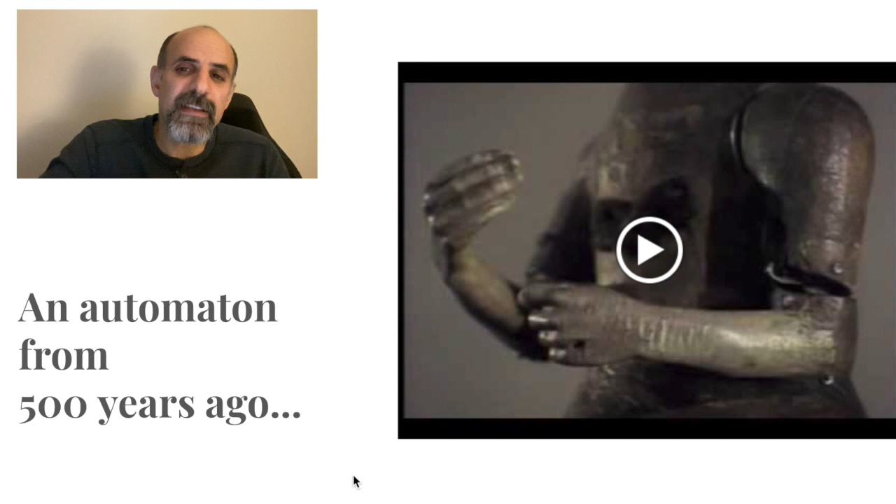So I'm including this short video, a figurine that is not exactly a robot. Nobody, by the time this was built, would have been using the word robot, but it's a figurine that works like a clock. It's a clockwork mechanism that you wind up, and it moves its mouth, it moves its feet, it moves its hand, it nods the head.

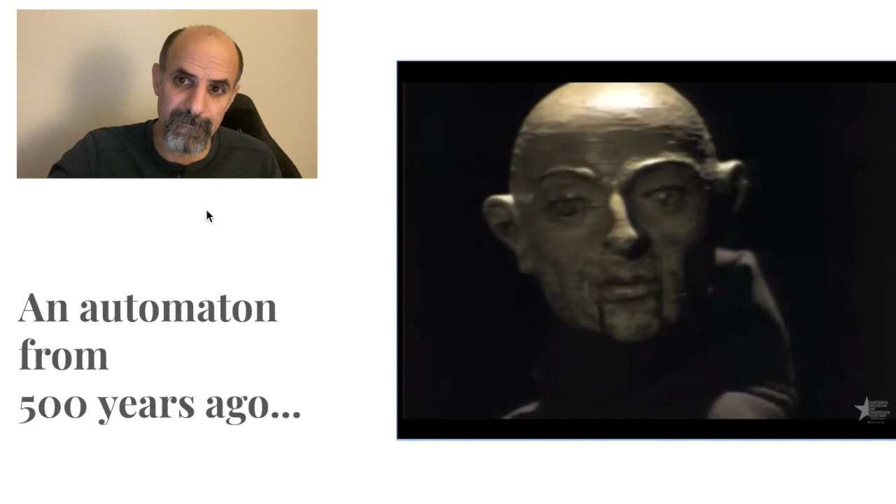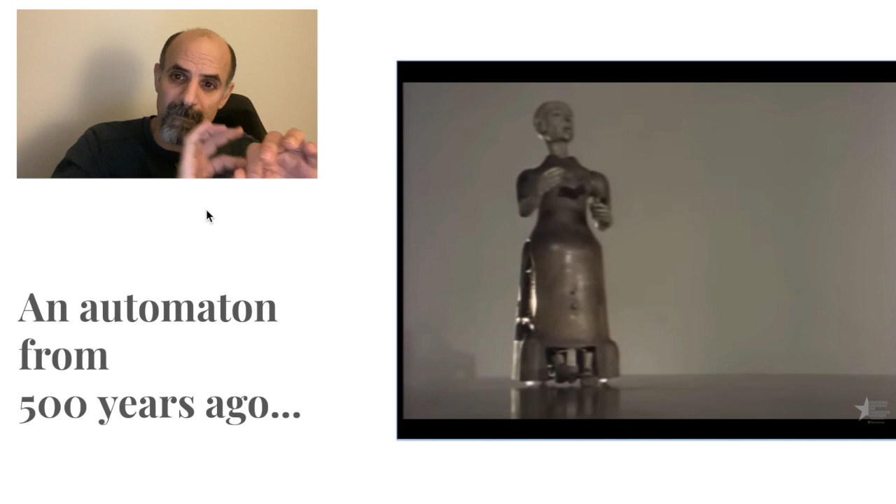So there's a very important question here: 500 years ago, some monk dedicated a lot of time to polish brass, right? Because you wouldn't go and buy it, you'd make the gears, craft these ceramic elements, all to make a machine look like a human, with functions and attributes that humans have. And this is 500 years ago.

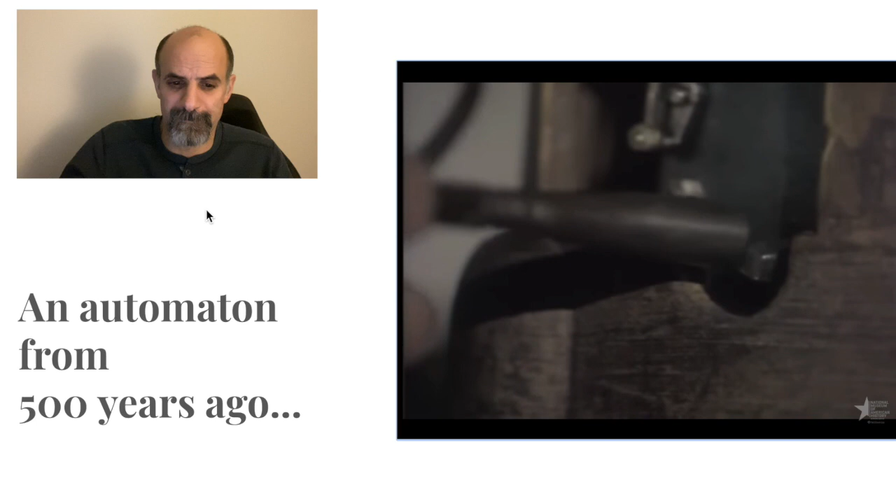We have proof of this. We also know that the word robot itself is a new word. The first time it was used was in 1921, in a play that used an element we could almost define like a zombie, where there was a human-like actor in the play, in the theater, manufacturing things, building things for others. Instead of calling them zombies or slaves, they called them robota. This word robot was later picked up by other science fiction writers, and a lot happened.

But I think I'm making a point here. 500 years ago, we didn't know what these things were, but we were already imagining them. I could even go much earlier. But if the first time we were using the word was in the 1920s, this is something really new, and there's a mysticism about what we imagine, very different from the pragmatism of the implementation.

So in general, we are faced with the idea that robots are made with software, electronics, and some mechanical elements. But is that true? Is a robot composed by those? I think we should think a little bit about this. If we go to Wikipedia, one of the sources with a lot of collective editing of definitions, it says something like: a robot is a mechanical or virtual artificial agent, usually an electromechanical machine that is guided by a computer program or electronic circuitry. But I think we'll be missing the point if we only read this definition.

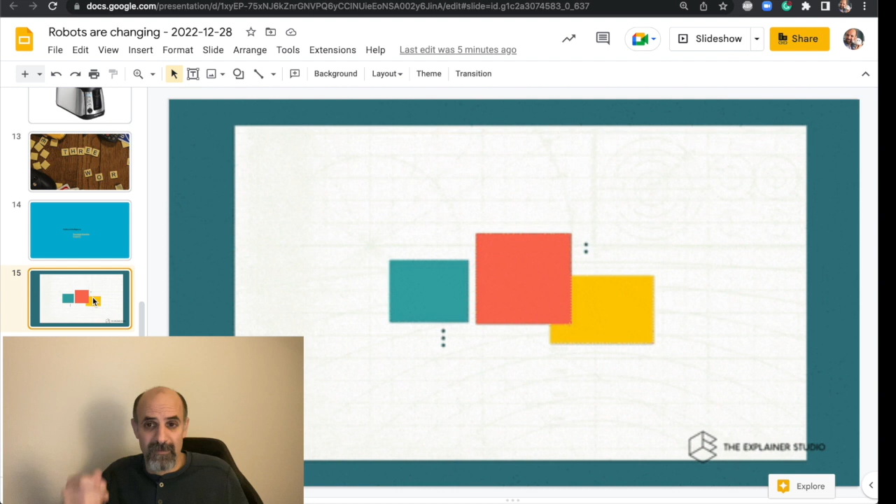And the other thing that is very up to date is that we have things like this, we are used to having technology that is trying to emulate the way we think. So I invite anybody to try the beta version of OpenAI. All scholars around the world are talking about this, to which extent humans are so unique. So you will see that you can even chat with it, and you will see that this really changes the way that we think. We can program a set of tasks. The monk at the beginning of my talk was just moving the hand, the mouth. But what happens if suddenly we have another set of tools?

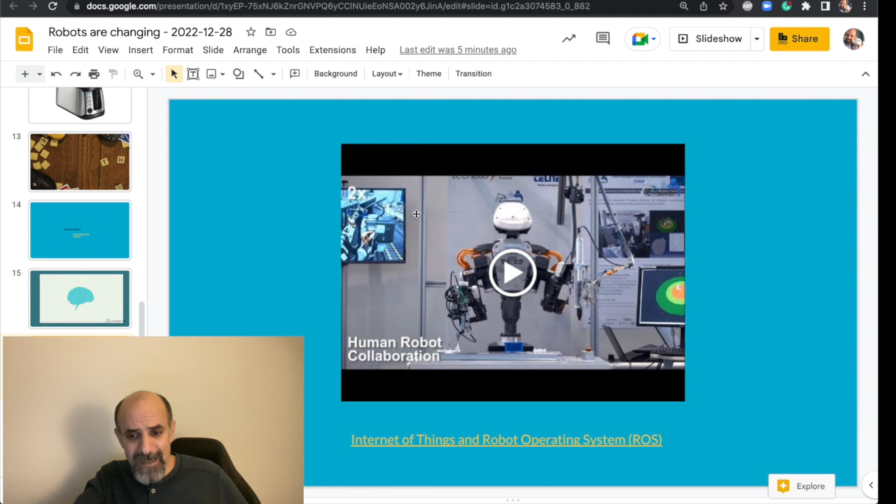And another word, because I said I will talk about three different words, another word is IoT, the Internet of Things, with the idea that everything is connected with everything. And this used to be almost like a fantasy, or like something that scientists around the world would think: oh, what if we put more than two computers together? What if we put more than four computers together?

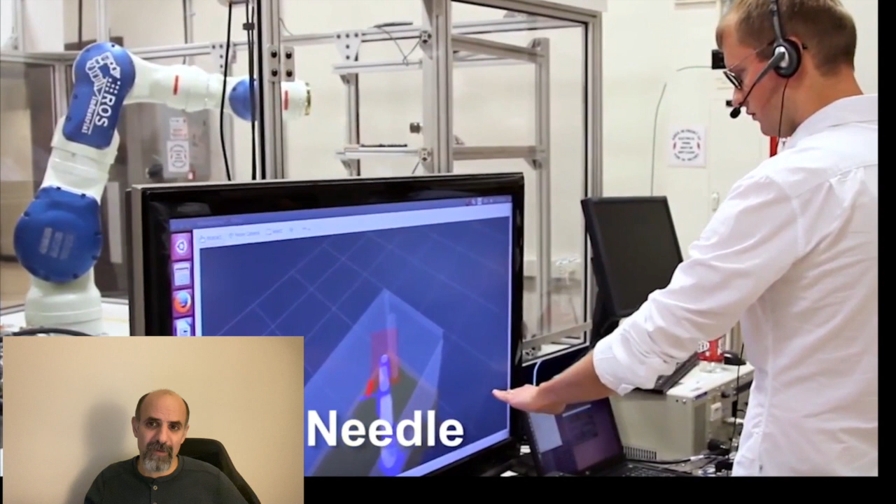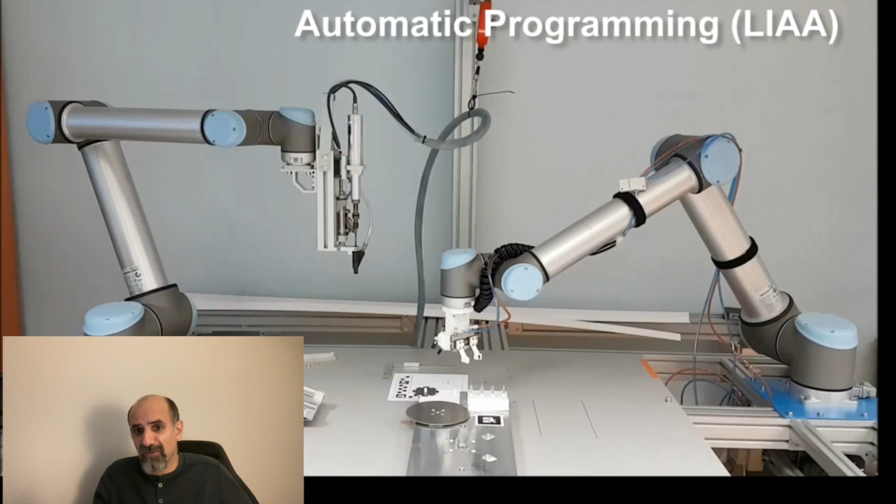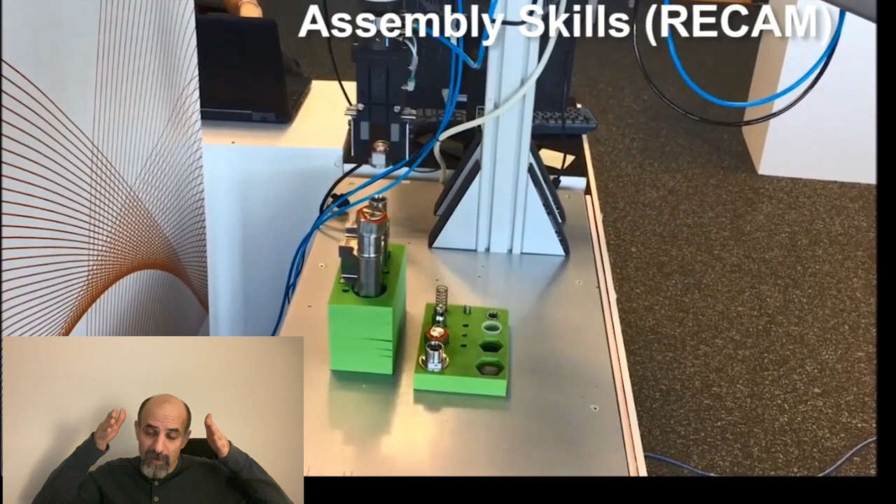So right now I'm showing images. This is the 5th anniversary of the Robot Operating System. It's, I would say, the most advanced system of programming robots. And it's using something that is decentralized. It doesn't use a concept that is a very old architecture. It's very dynamic because every part of the robot can be addressed as a messenger, and they're all listening to each other, and that is really a game changer.

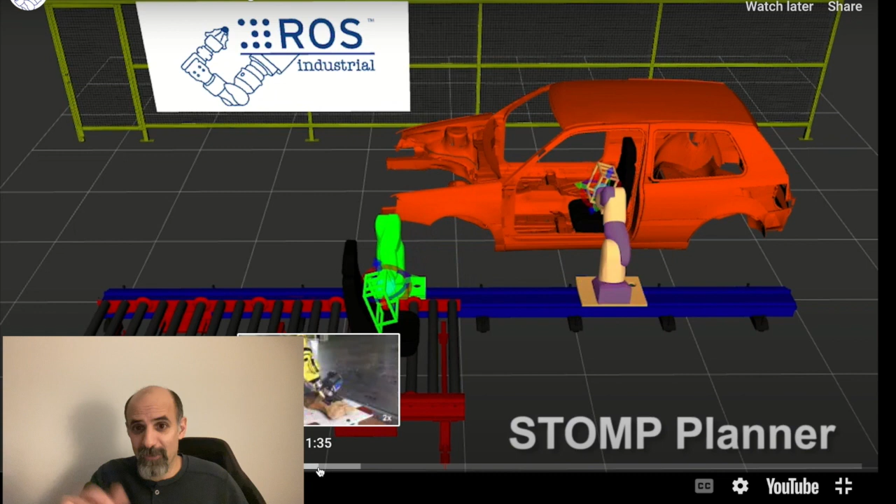But the newer version of the protocol of internet for connecting things has an address, has a number. Now, the amount of devices that we could connect together with this protocol is equal to the amount of grains of sand on the surface of the earth. So that means that we could potentially connect everything with everything. This is not something that we were thinking about when we had the first robots.

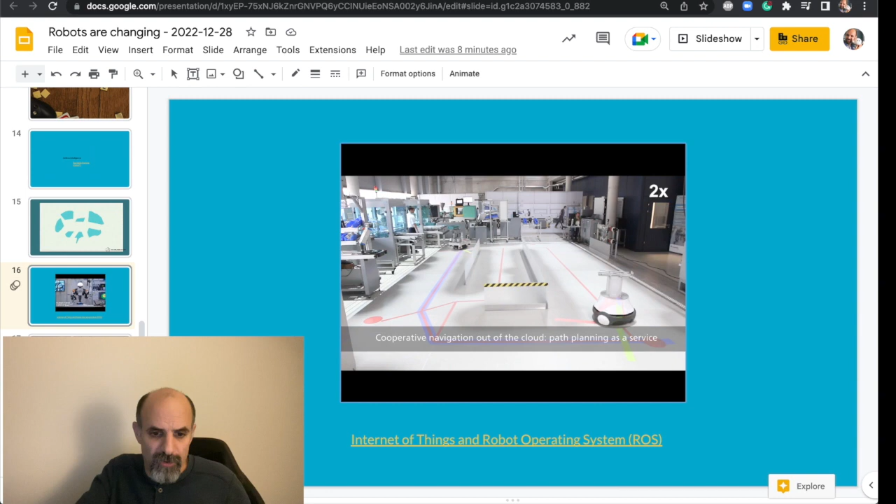This idea that we have artificial intelligence and IoT coming together happens at the moment when we've also been struggling a lot to define control. This history is very important.

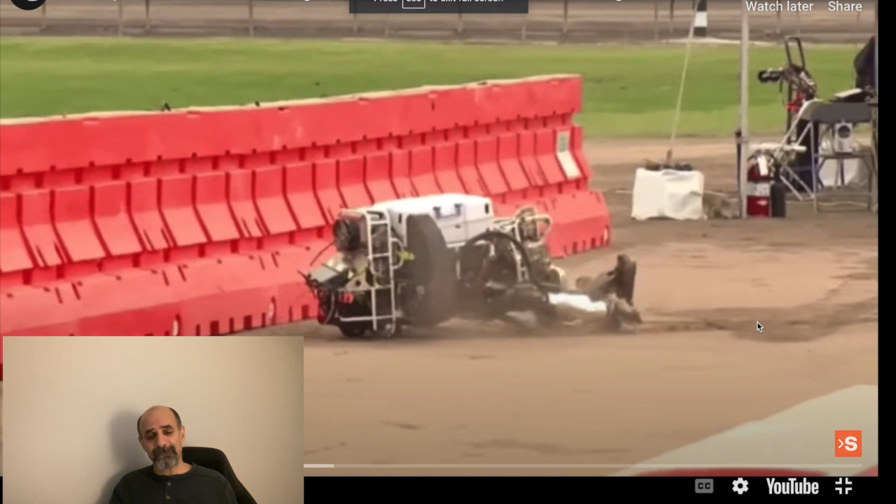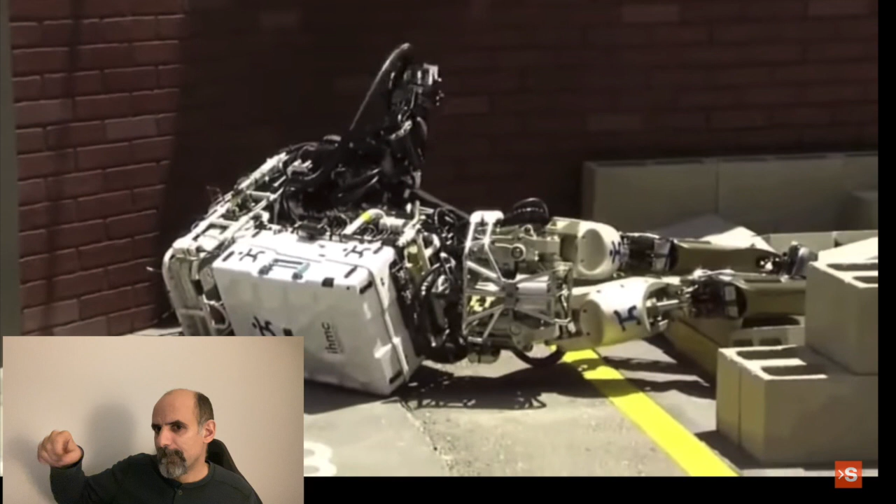Instead of getting into a theoretical conversation about cybernetics, I can show some images that are at the core of the development of robotics. These images are from a competition organized by DARPA in the US, where scientists from around the world bring their robots. It's very challenging to program a robot that can drive a car, get down from the car, climb some stairs, grab a power tool, dig a hole, then pass its hand through that hole and act on a valve.

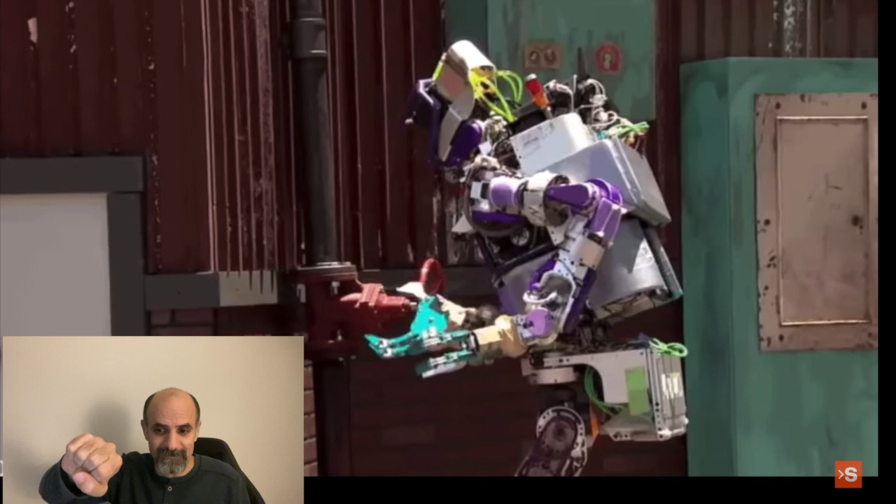And the result is quite hilarious, I think. So when we think about this, the robots are changing everything. Now the robots are also changing manufacturing methods. AI, IoT, this new method of control is really changing the way we see the world.

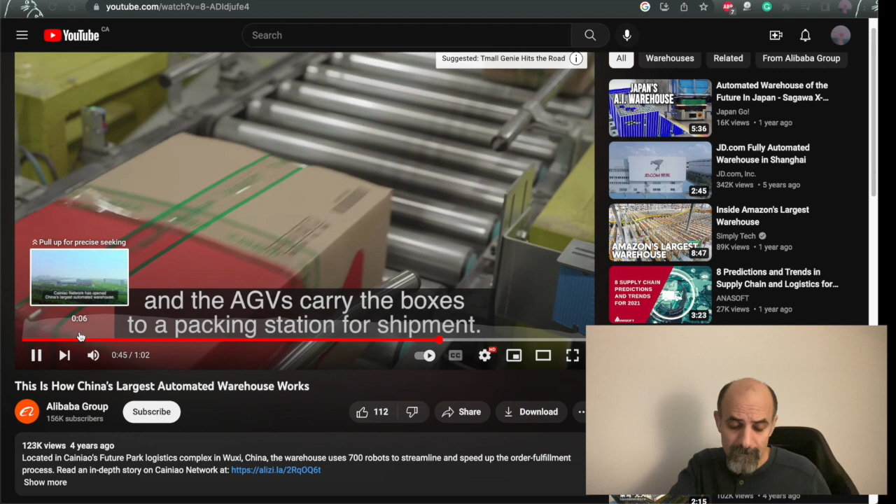How are the applications of this? I selected a couple of things for us to get a bit of the landscape. What is happening today? This is just a warehouse - I think the pronunciation probably isn't great, but Cainiao. You don't see people there. There are all these robots that each have an address.

And they are all connecting with each other, and we'll see some of the ways this has been really changing, one after the other, with small incremental changes. This is something happening today that before, we were not able to have mechanisms of control that could act so quickly.

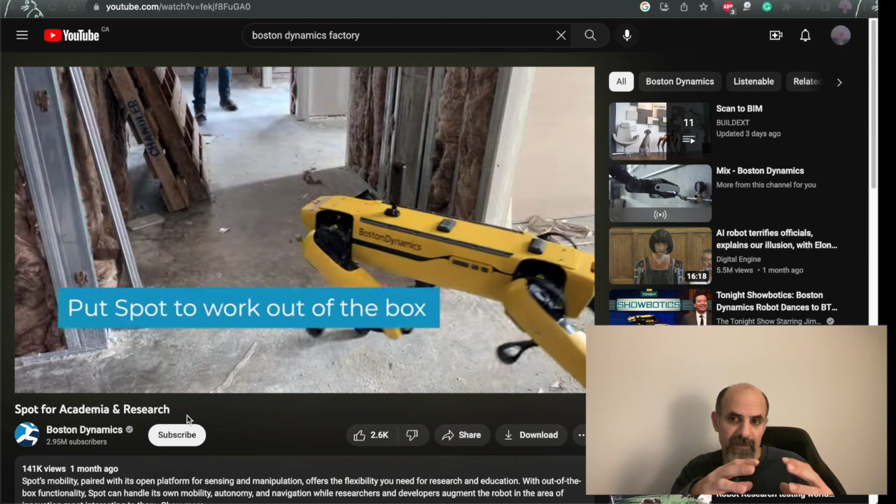But now the designing methods for the robots are also using AI. And the way the devices interact with the environment is not only through a cable in a centralized model - everything connects with everything. This is totally crazy because it's going so fast that it's very difficult for me even to keep pace with the development.

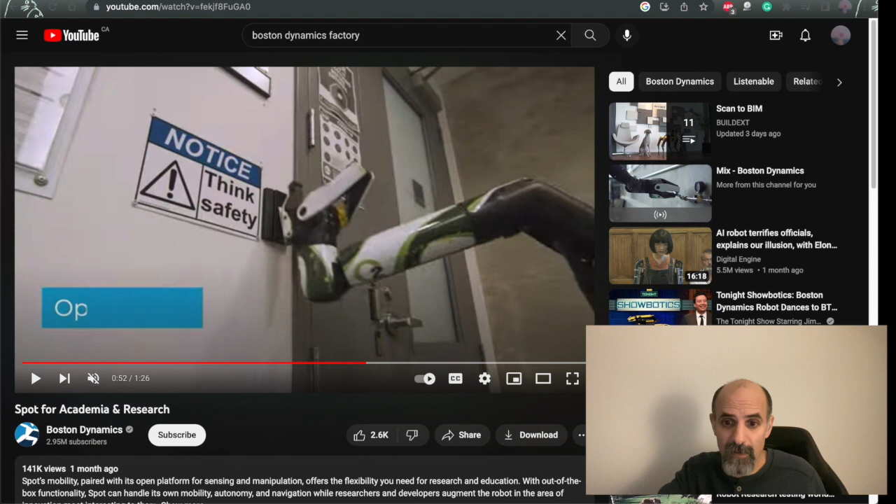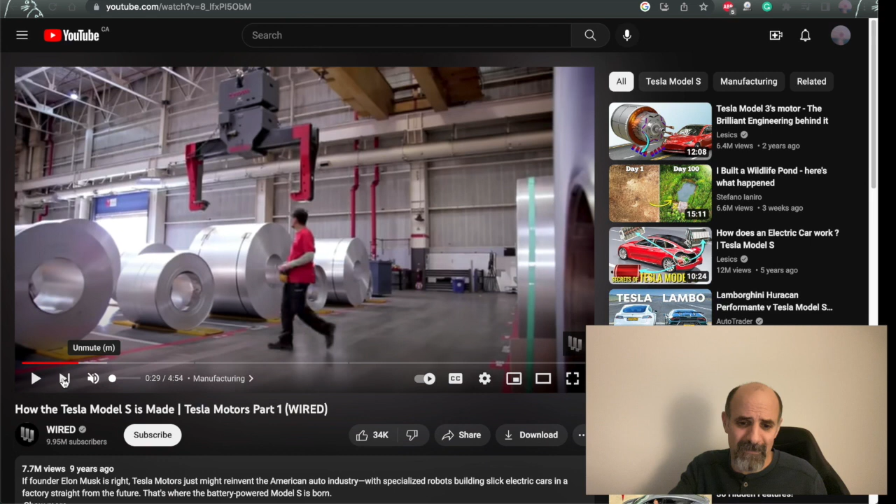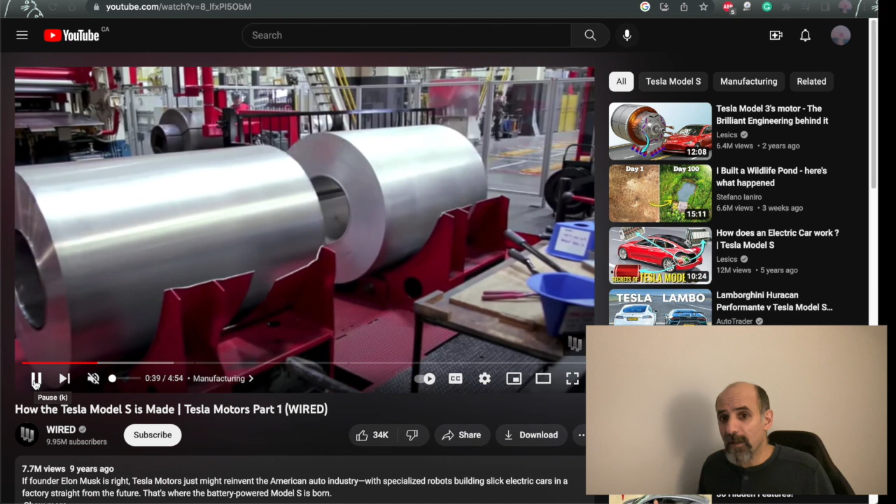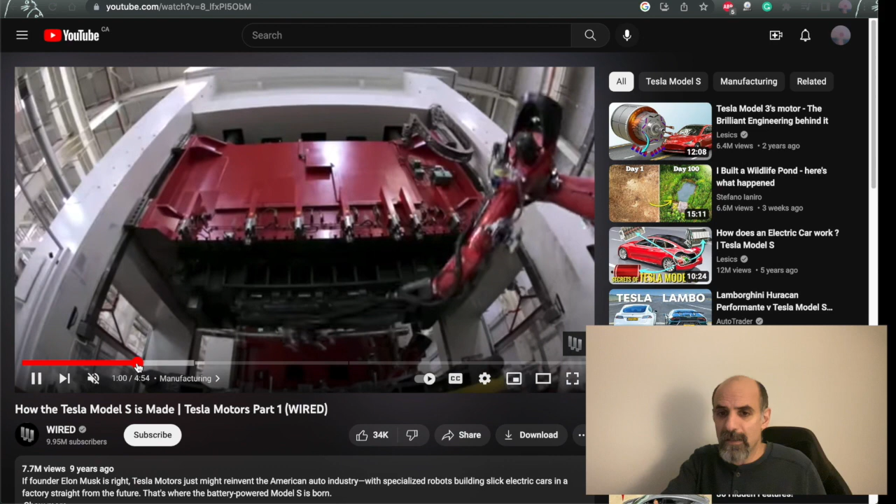Now, I'm not talking about science fiction only - I do talk about science fiction, but not only. This is a video that's not so new, already 10 years old, showing how a Tesla car is manufactured. These kinds of gigafactories are more and more common. Raw materials come in, there are some people working in the factory - it's not like it doesn't have anybody - but you seldom see human beings. The reason is that this is very efficient.

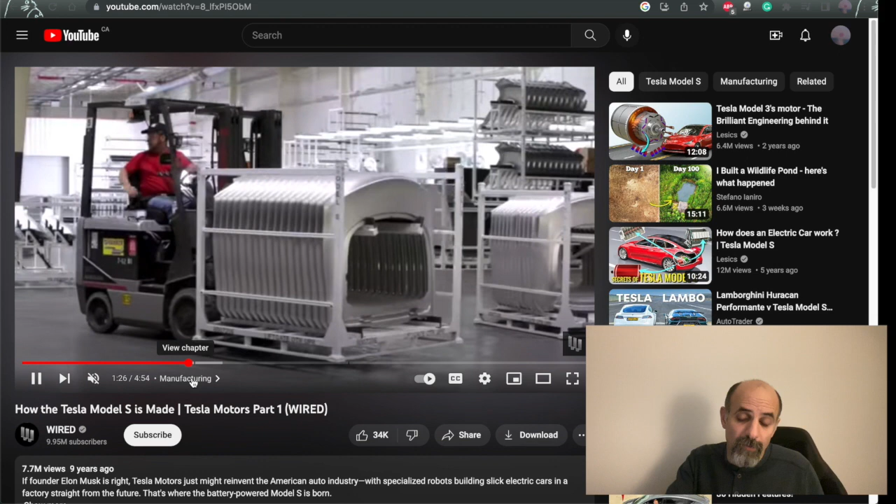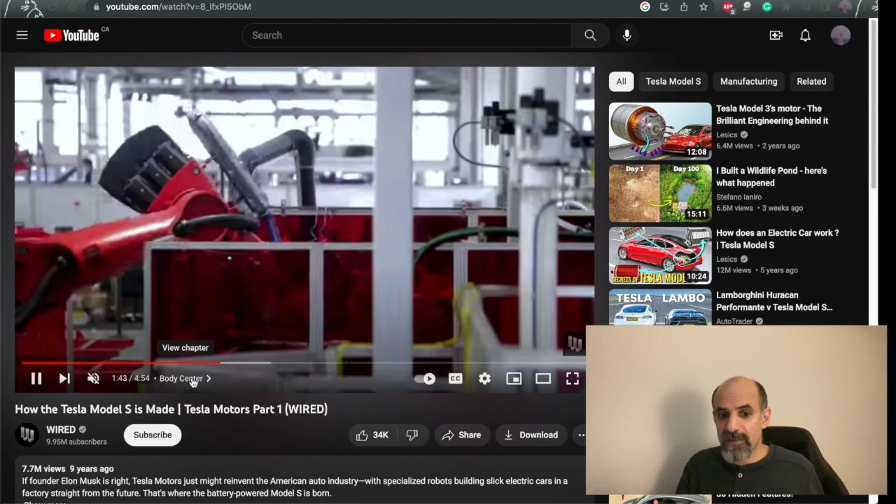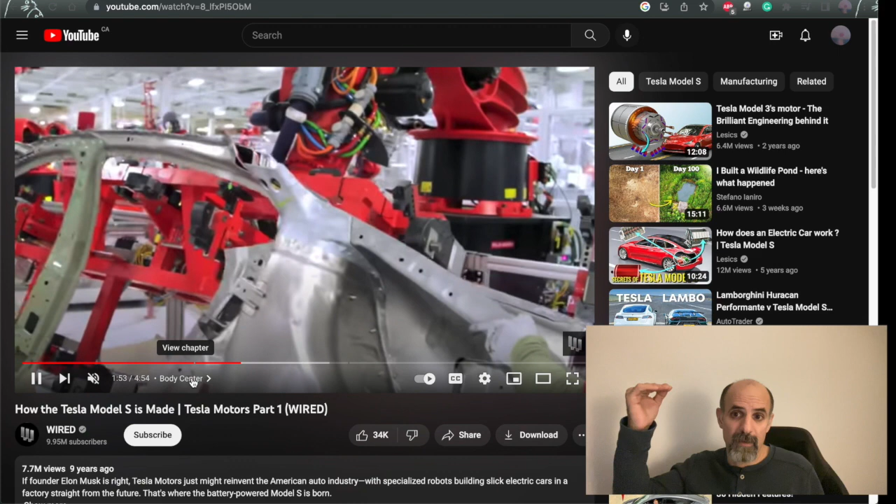It's also very pleasant for me, since I was working in manufacturing - this is very noisy, an environment I'm very glad to see robots in. The changes we've seen have completely taken over human intervention, optimizing productivity to levels we weren't thinking of before.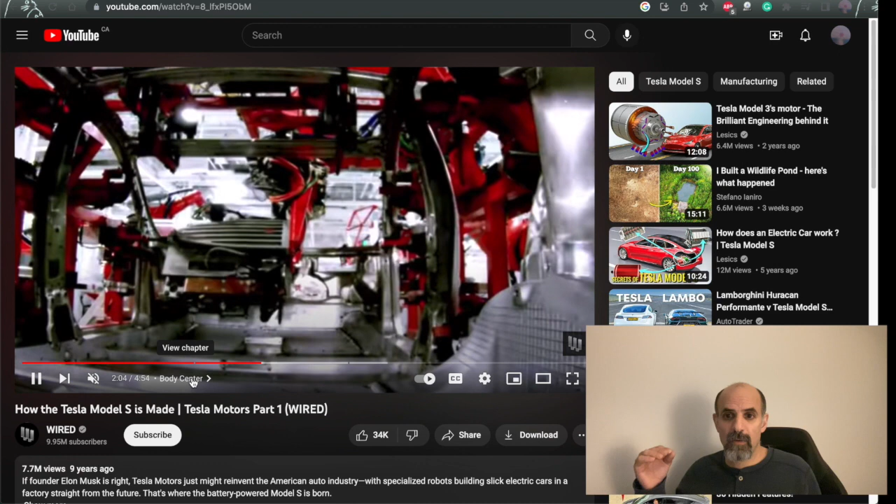Now we are using deep learning to forecast when the robots are going to need maintenance. We're getting to a level that's really changing the way we see things - the impact is increasing, and it's difficult to imagine where it's going to stop.

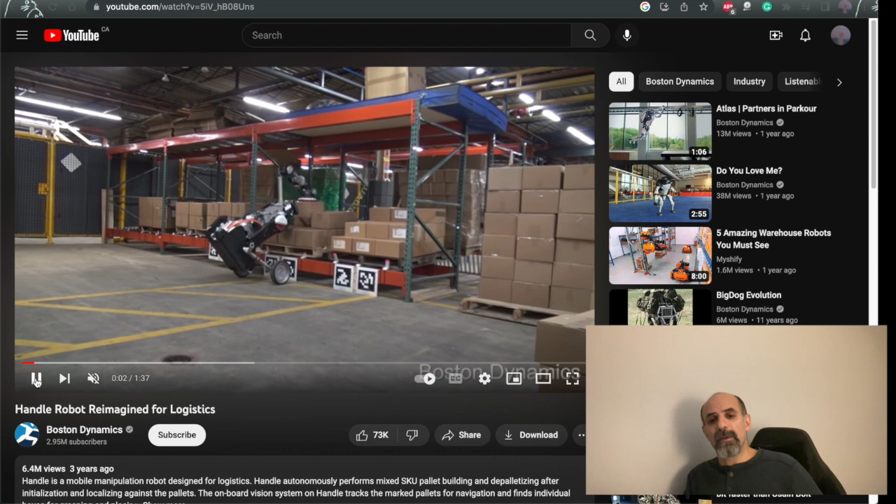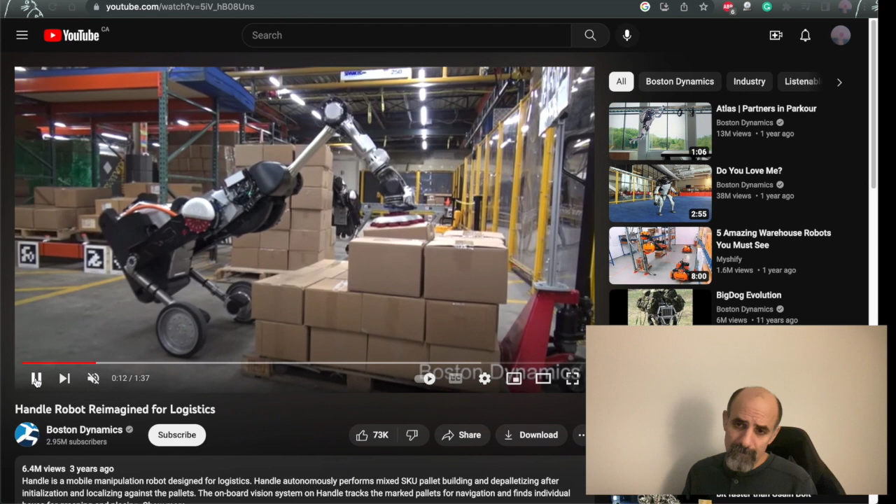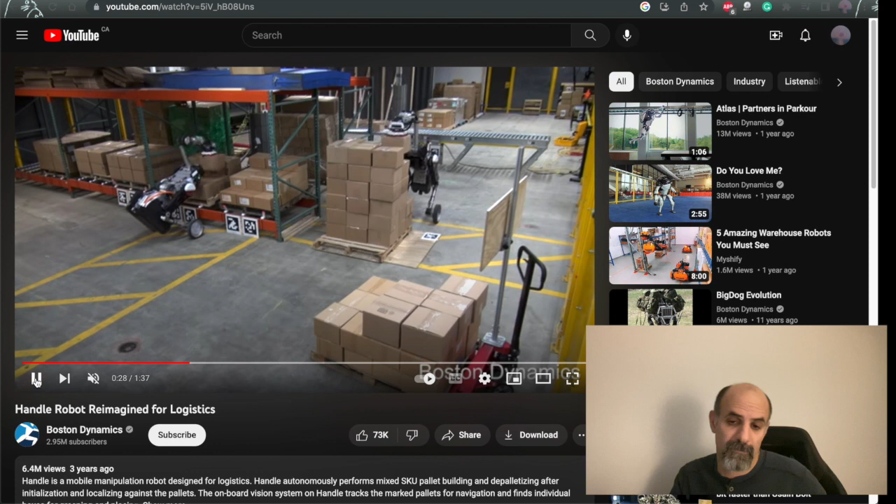But let me show you a little bit of what we are seeing right now. This is a robot that self-balances and identifies with computer vision where to go - it's not centrally controlled. Today this is just an experiment; it's something not that new, but newer things are happening.

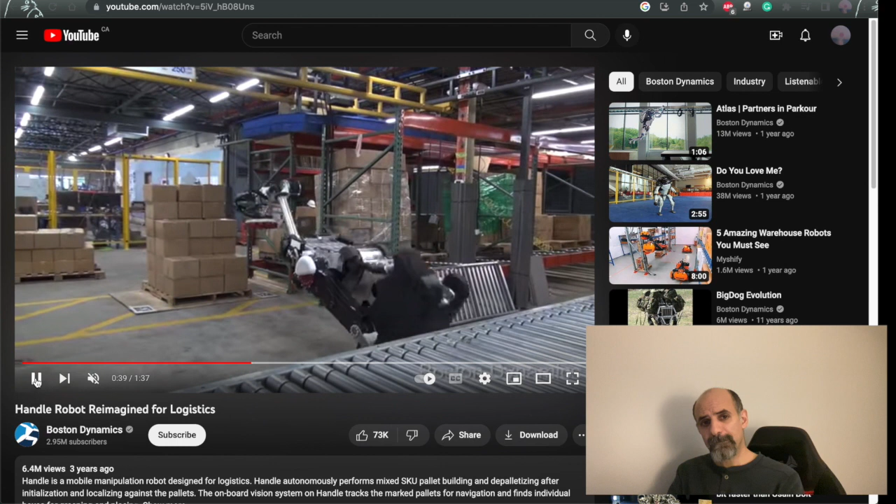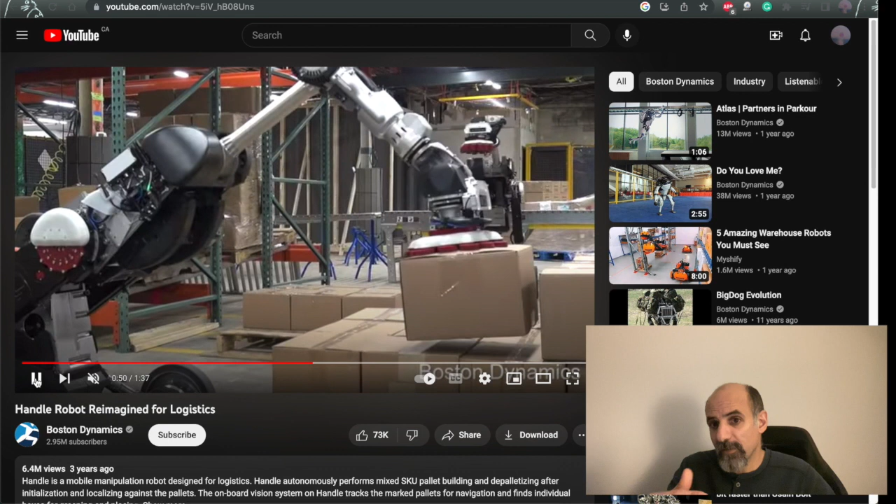I'll show you a couple of them, but we see how these new technologies are really allowing us to explore newer ways to reimagine the factories. One of the difficulties we have with robots in general is, when we talk about a robot that has a tool - well, is the tool adaptable? And then when we think about tools...

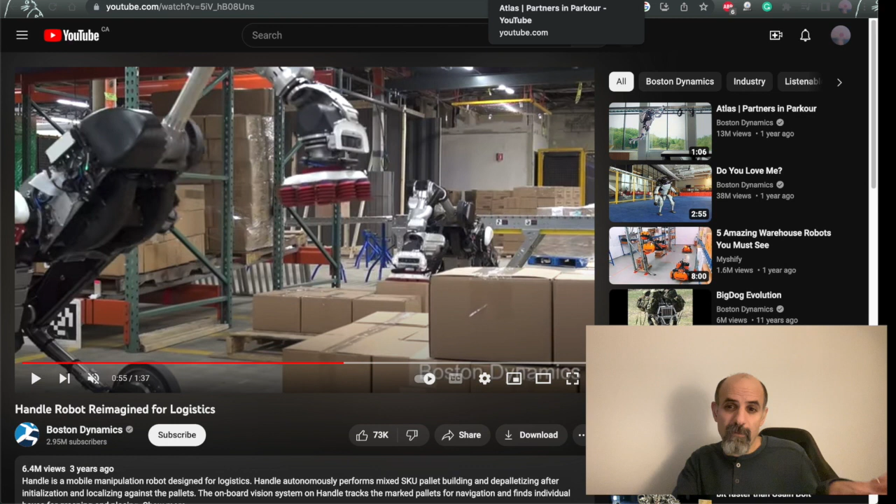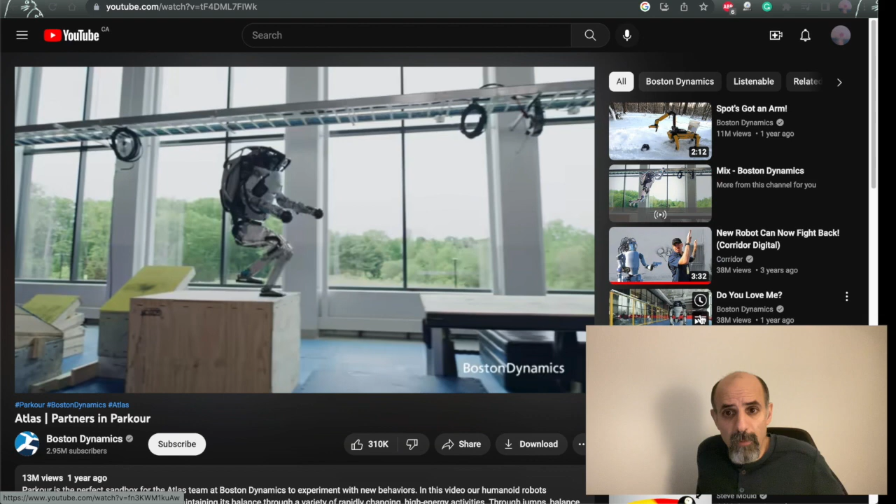Hands, I'm sorry, but they are the best tools. And bipeds are able to go through very difficult terrains. So the idea that robots will have wheels has been coming and going, and perhaps now we're getting to a moment where we think robots walking is not going to be a problem - not one of those things where we say it could be done, but it's too expensive.

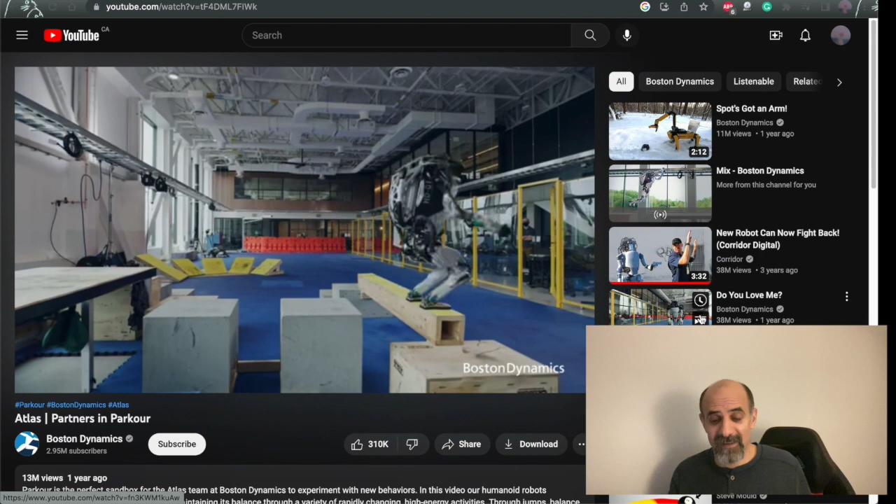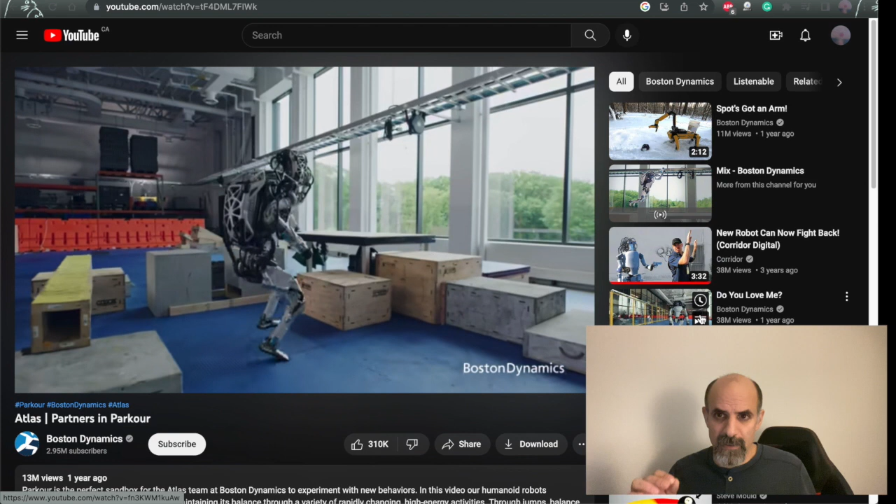So this, of course, is a fancy demo. I can imagine the number of times they launched it in order to get the robots not to fall, even once. Nevertheless, we are getting there. I'm seeing a series of changes that's really radical in the industry, and we see the incremental changes where China is one of the biggest manufacturers of robot systems for industrialization today.

That's not going to stop. I really don't think that's the case. It's really going to be more and more radical, and we see the impact of certain discoveries that happened in the last years.

One of them is the way that we have been understanding nature as one of the influences on design for robots. Robert Full has great work because he has been able to cross disciplines from biology, working with choreographers and dancers, to understand better the body, and he draws conclusions from his experiments.

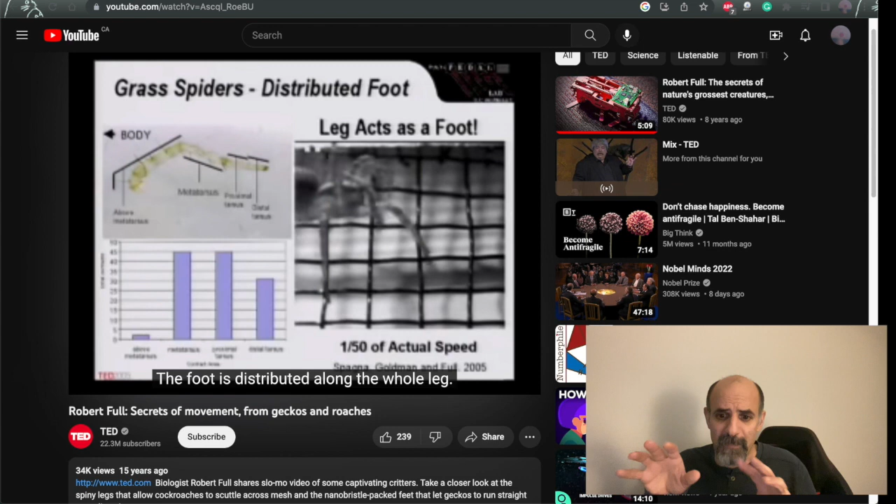I'll show some of the experiments in a second, but it's like distribute control, use hybrid solutions, and don't try to mimic nature, but be inspired by biology. Robert Full is incredible because he studies roaches, he studies spiders, and then he uses some of that knowledge to build robots.

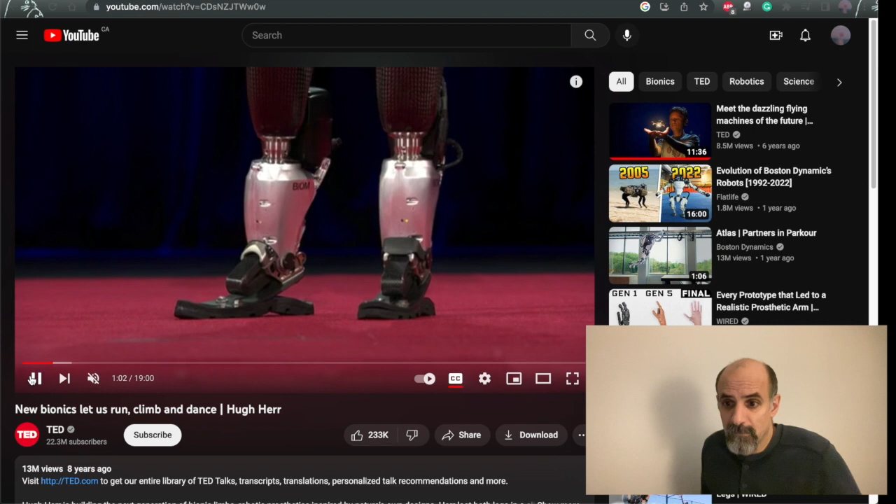And he's not the only one. I think that at some point we are starting to see that many of the places that have great innovation have been with leaders that went one step ahead. They say, okay, I lost my legs, but I enjoy climbing.

For example, Hugh Herr in the biomechatronics program at MIT is one of the leaders, and we are seeing how the discoveries he's doing are influencing many other aspects. His story is very inspiring because he lost his legs and he wanted to continue climbing, and he did prototype after prototype. He didn't stop, and he was able to bring this to many others.

Now, the influence of this into robotics is a little bit tangent. When are we going to use this model to affect the industry? Well, definitely yes, it is the reason that we are able now to build things that are unthinkable before.

So I'm showing right now a figure of a dancer because she's dancing with a robotic leg. This prosthetic is not only lightweight but responds super well to adapt to the movements, and it has been designed also with AI. The idea is that we have all these great technologies that let us take one step forward in how we think about the way we manufacture and the way our supply chains are. It's really changing, and the robots are changing.

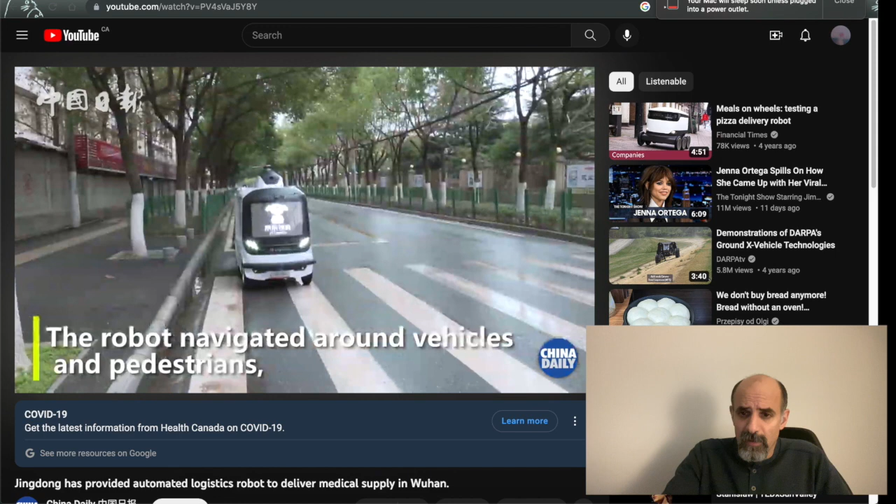Here we have something that is happening today, and you know this already. I bet that you have seen either from Alibaba or any of the other competitors. Even if you have been at a hotel, or last time I've been in Haidilao, a hot pot place, there's a robot waiter. So these kinds of things, we start to see them. I think many of them are also fuzz, but anyways, I think that there's a huge space for us to be there.

And there is a professor that, when I was chatting about this, was telling me, well, we will not need people to design robots anymore. The robots will design robots. The AI algorithms are going to take over once we achieve a level where there's no more human intervention. We don't really have space for humans there.

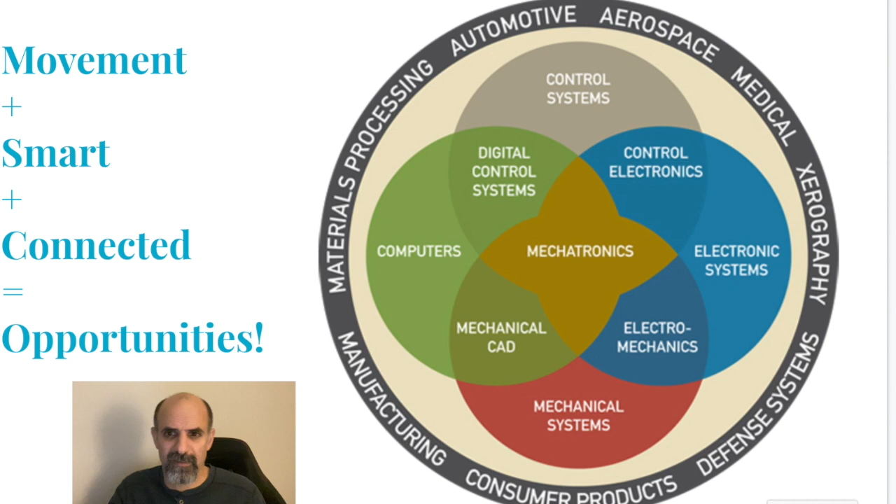Nevertheless, I think that we can circle back and think a little bit about how these machines are moving, how they're thinking, how we connect all these dots together. It's full of opportunities. I included a small graphic with mechatronics at the center, thinking that it incorporates mechanical systems, electronics, computer science, and it also has control systems.

It's full of opportunities, so it would be great to see more and more changes in the upcoming years. There's a little bit of thinking of where this is going, but it's a story that we should all build together.

It's a little bit of a fake, right? Everything is half pre-programmed and half remote control. Nevertheless, we're getting there. It will be very exciting to see some of you building new applications.